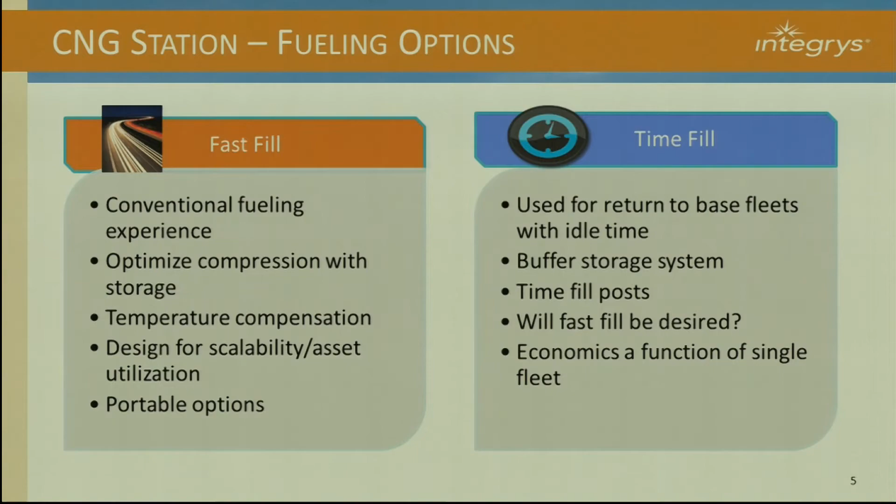That's not really acceptable for heavy duty vehicles. So you want to see something on the order of 8 to 10 gallons per minute fills, something that's as fast as the vehicle can actually take the fuel.

You want to have that station designed for scalability, so that as traffic through that station grows, the volume the station delivers continues to grow, to always ensure we're getting good, fast fills regardless of how busy a station happens to be.

And then in the fast fill category, we do have portable options. This was actually pretty attractive to a large customer of ours who's in the telecommunications business, and if you listed them alphabetically, they'd be the first one.

They had to prepare for Hurricane Irene that hit the East Coast, and they purchased from us portable stations. We moved those stations around to key locations so that when they were in a situation where they knew power was going to be out, they could get fuel to their fleets, so their fleets could continue restoring telecommunications service along that eastern seaboard.

Some of the station considerations: the model we have at Integrys is to build commercial access fast fill stations that meet or exceed the status quo experience. Our view is that the last thing you want to do as a consumer is compromise in the refueling experience that you have with any vehicle.

As soon as you ask a consumer to compromise, it puts you in the category of being an alternative fuel. CNG does not need to be classified as an alternative fuel. In many ways, as Bob mentioned some of them today, it's a superior fuel to the status quo, so we don't want to deteriorate that experience by providing an unsatisfactory or a slow fill.

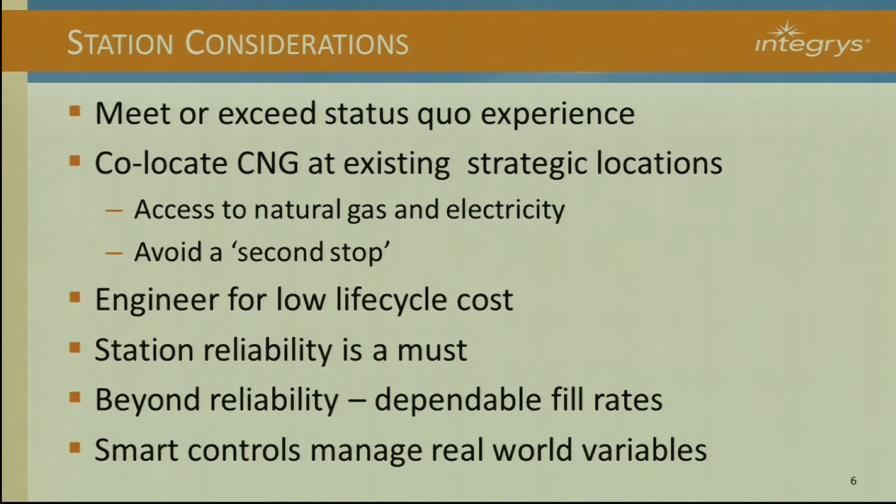What we do is go around and co-locate our compressed natural gas refueling infrastructure at existing strategic locations. So places where stations exist today and traffic volume and freight volumes exist, we bring that capability to those stations that have access to natural gas and electricity. That provides a full service, full featured refueling environment, so your drivers don't need to make a second stop.

You don't have to go one place to get the vehicle refueled and then another place to get a cup of coffee and so on.

We design our stations for low life cycle cost. Station reliability, that goes without saying. If you pull up to a gas station today and a pump happens to be out of service, they put a paper bag on the handle of the pump. If a compressed natural gas station is out of service, you need to put a bag over the entire facility. That's simply not acceptable. So reliability is a given, and we need to take that one step further and ensure that we've got dependable fill rates every time, regardless of how busy that station might be.

And then our CNG equipment employs smart controls to manage the overall fueling equipment so that real-world variables like temperature and the amount of traffic at that station are all compensated for by the equipment to ensure that everything works flawlessly every time.

So let's just take a quick look at what's involved in a CNG station design. First of all, we connect to the local utility. That's where the natural gas is received. And it comes from the utility at various pressures.

Sometimes it might be maybe a 25-pound pressure. The higher the pressure, the better from a station's perspective. Maybe 100 pounds or 150-pound inlet would be a fantastic supply from the utility. Now, there are lots of quality standards around the natural gas that comes through the pipeline distribution system, so we don't really have to worry about variation in BTU content or the chemical composition, anything like that.

We can have a lot of confidence in that. But the one thing we want to make sure is that we don't get moisture into the system. So right out of the gate, we run the gas through a dryer prior to then running it into a compressor station. Now, a compressor, this is time-tested technology. The compressors that we use in a CNG station are the same thing that we use out in the oil and gas patch, where they're producing natural gas and pumping it down the pipeline.

It's well understood technology, but compressors are absolutely a maintenance item, especially when they start and stop a lot. So part of the station design and part of our smart controls is to minimize the frequency of starts and stops of the main compressor.

That compressor is then filling a storage bank. Depending upon the station requirements, we might have anywhere between 90 to 1,000 gallons - when I say gallons, I always mean gasoline gallon equivalent - of storage that are on hand to meet any surge requirements that station could have from multiple vehicles pulling up.

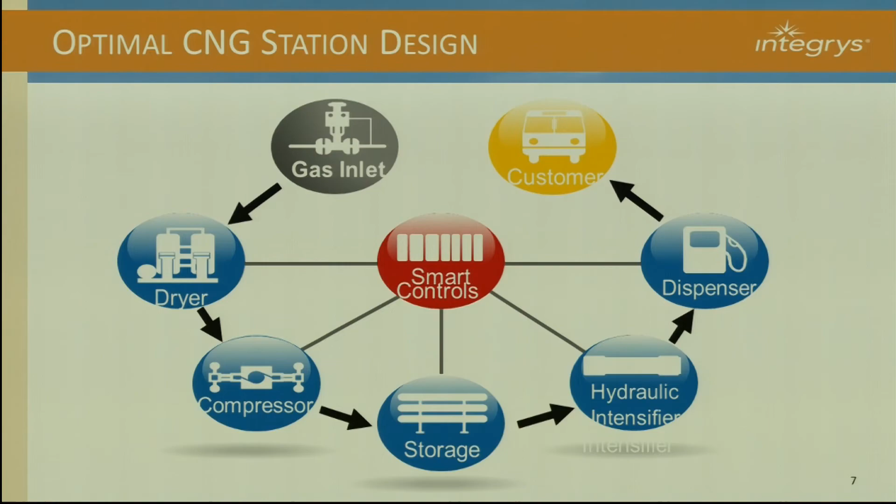And then a device that we put in our stations, it's a patented technology that we have to really ensure the high deliverability to the dispenser station, is something called a hydraulic intensifier. Now, the magic of this device is that we're pulling natural gas from storage, regardless of how much gas is in storage. That hydraulic intensifier takes the natural gas and delivers it to the dispenser at full pressure all the time, regardless of if storage is full or 50% or even down to 10 or 20%.

The nice thing about the hydraulic intensifier is that it's a hydraulically driven device. It's not a compressor. Recall I said compressors don't like it when you start and stop frequently. Hydraulics don't care at all. They're a very low maintenance item. They can start at a moment's notice, shut back down, restart again, no big deal, and they'll do that for many, many years with very, very low maintenance costs.

So that's kind of a key component in ensuring that the vehicle that is connected to that dispenser station is always receiving a rapid fill, regardless of how much gas might happen to be in storage. And that varies depending upon how many vehicles have pulled through recently. So it maybe sounds a little bit involved, perhaps compared to a traditional storage tank with a pump to fill your vehicle.

The good news is that these systems are skid mounted, so it makes delivery very simple. There is no underground storage with CNG. The equipment is expandable—we can put it in weatherproof, sound attenuating enclosures, and it is to some extent relocatable because it's sitting on a concrete pad at a site.

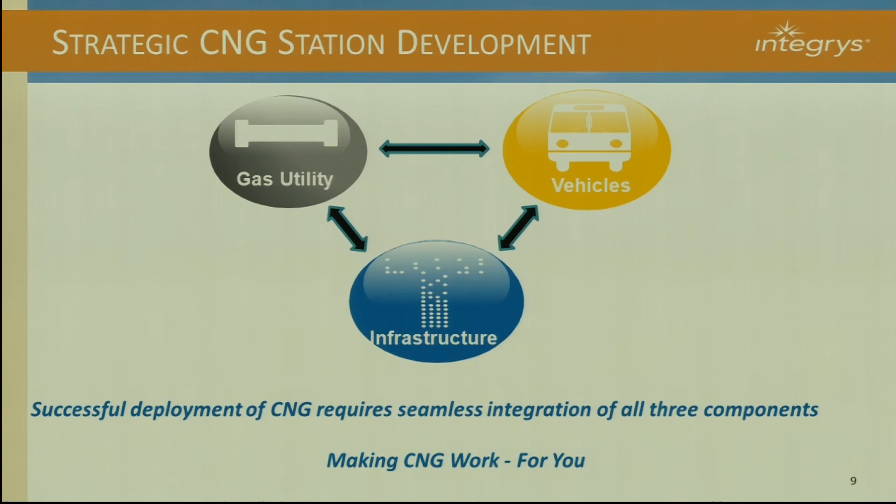It's not buried down into the ground, making relocation really expensive. So when it comes to making CNG really viable, we think the key is bringing together the capabilities that exist in the gas utilities around the country, the CNG infrastructure I briefly described today, and of course vehicles and vehicle availability, which is growing really rapidly.

I wanted to address a couple of the questions that were mentioned. One was conversion costs around heavy-duty trucks. The most common heavy-duty truck today is powered by a Cummins 9-liter engine. That's a spark ignition engine that was designed from the ground up to run on compressed natural gas. So there was a question about efficiency.

There is an inherent efficiency derate between a diesel engine and a spark ignition engine. So if you're running a diesel truck today and considering buying a new Kenworth with this Cummins engine in it, you have to take into consideration an expectation that the Cummins engine will be less fuel efficient. Now, the fuel efficiency derate is not as much as if you would just convert a traditional gas engine today.

If you convert a traditional gas engine—an engine designed to run on gasoline—you could expect to see a 15 to 20% efficiency derate from diesel to that traditional gas engine. The Cummins engine is designed to run on natural gas, so they're able to run higher compression ratios. It's early, but we're understanding between a 5 and 10% efficiency derate. So when comparing diesel to CNG, you need to keep that in mind.